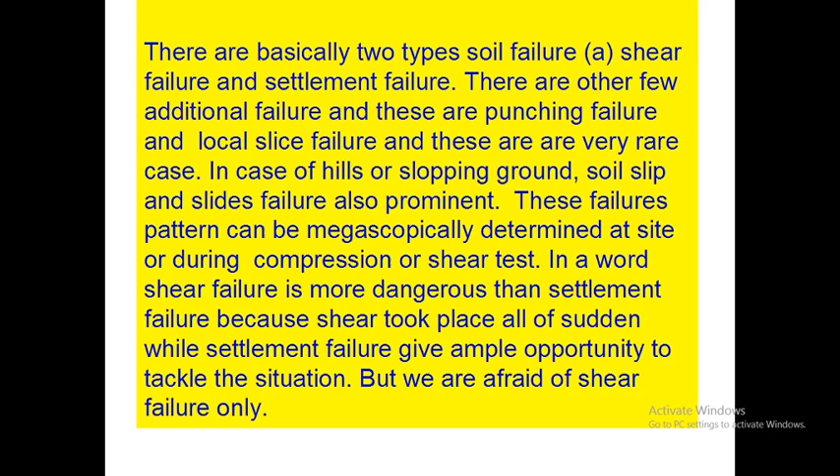while settlement failure gives ample opportunity to tackle the situation. But we do not know why, we are always afraid of settlement failure only, ignoring the complexity of shear failure. We should be very much serious about shear failure only.

During my long and young age, one of my reverend professors once said workmanship has a main role in engineering and construction. He had casually also said that in Kashmir Valley, more than 50% of buildings are designed by ordinary skilled workmen, which we generally know as masons, and the rest 50% are well designed by engineers.

But buildings constructed by masons are completely safe for more than a few decades. This implies that an improperly designed or overloaded structure with good workmanship is much better than a well-designed or normally loaded structure with poor workmanship. But what I personally see is that we do not concern ourselves about workmanship at site, or we are least concerned about workmanship.

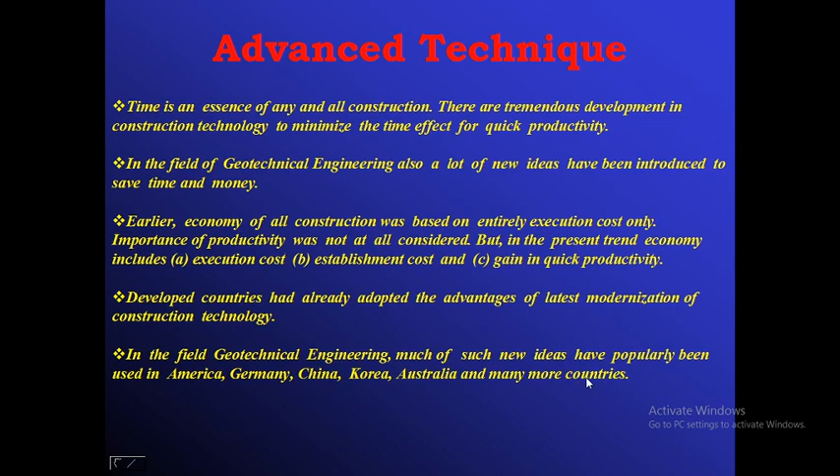Normally what happens at site, if we go for geotechnical investigation works, right from sampling to laboratory testing and complete interpretation of test results, it will take about 1.5 months, or even if it is a big project, then it is 2 months, 3 months, like that.

But there is some type of structure which is founded at a depth of say about 2 meters or 3 meters. For those types of structures, we can estimate the required design parameters such as density, void index, SBC, settlement, etc., by conducting dynamic plate load tests as per ASTM E 2835, using the kinetic energy principles.

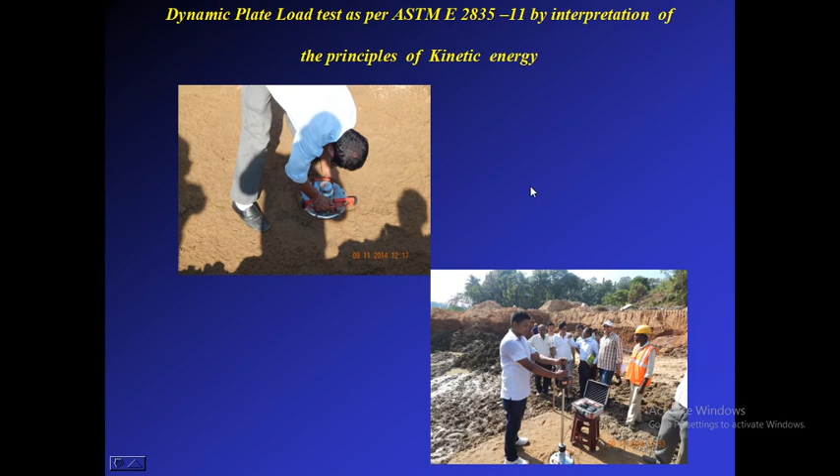In this test, first we have to make an excavated pit up to the proposed depth of foundation, where we shall place the plate perfectly horizontal. This instrument consists of a drive weight, which will fall down from a specific height, causing deflection of the plate, and with that we can calculate the SBC, unit weight (soil density), percentage of compaction, and everything.

This instrument first gives EVD. EVD means soil resilience, the load absorbing capacity. From this load absorbing capacity, we can convert it to force.

The velocity is root over 2gh. We know the height, we know g, and using the impact velocity, we can calculate accordingly. Now we know the plate size, and the kinetic energy is half mv square, so we get this much. Then we can calculate the force, considering the deflection of the plate.

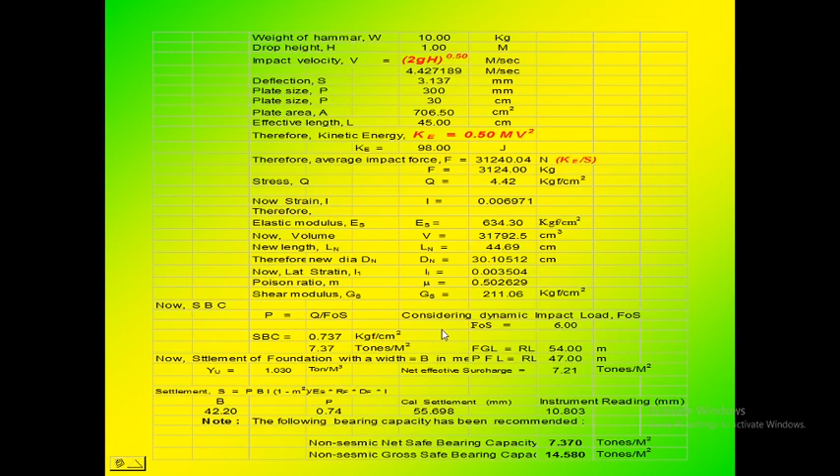From there we can calculate the strain and elastic modulus and shear modulus. And with that load, applying the safety factor, we can calculate the safe bearing capacity. So, see, this another procedure is a very simple procedure.

When there is a foundation soil that appears unsuitable for construction purposes, meaning very low bearing capacity, in some cases especially in northeastern India the top portion, say up to 3 or 4 meters, is very soft and compressible because it is a high water table zone. The NER region, except the hills, is mostly alluvial soil where the water table is close to the ground level.

So soils become oversaturated and the existing overburden is generally resisted only by pore water pressure. In such cases, normally most people prefer to go for pile foundation. But pile foundation is not only costly but also time consuming.

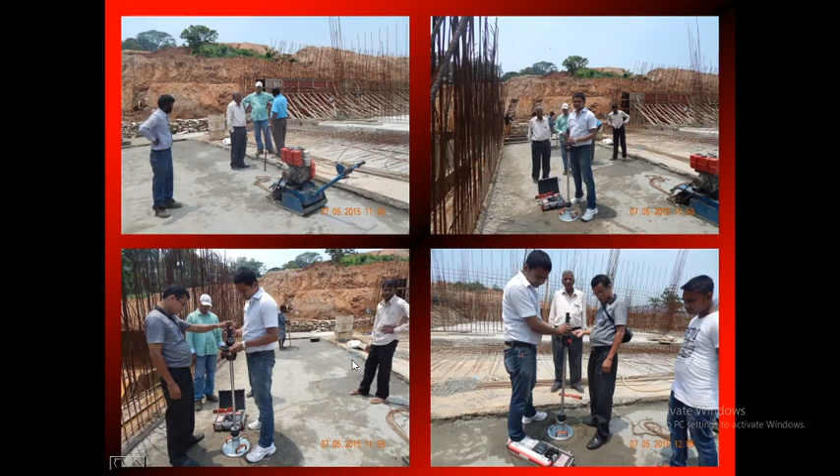In this picture you can see what we normally did. For foundation backfill, we generally dump the excavated material and allow it to consolidate and compact naturally.

But instead of that, another problem arises. Although we do not usually consider the side friction of the foundation, this is most important when, in SBC analysis, we apply the depth factor correction. Depth factor means the frictional resistance provided by the surface of the foundation which is connected with the soil. This soil will give some surface resistance.

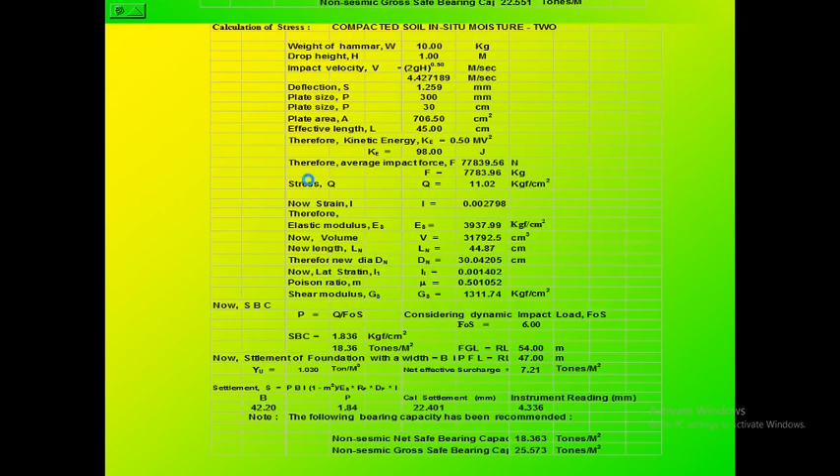You see, we can check this using this instrument. It is the initial layer, it is 93.98, say it is 94% Proctor density compaction, and it is good; more than 90% is good. And the EVD is coming 14.93 Newton per millimeter square. It is soil resilience. Soil resilience means its load absorbing capacity.

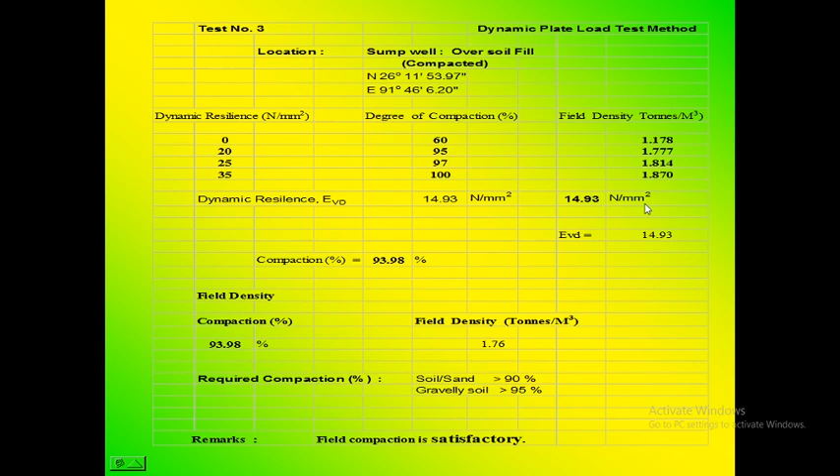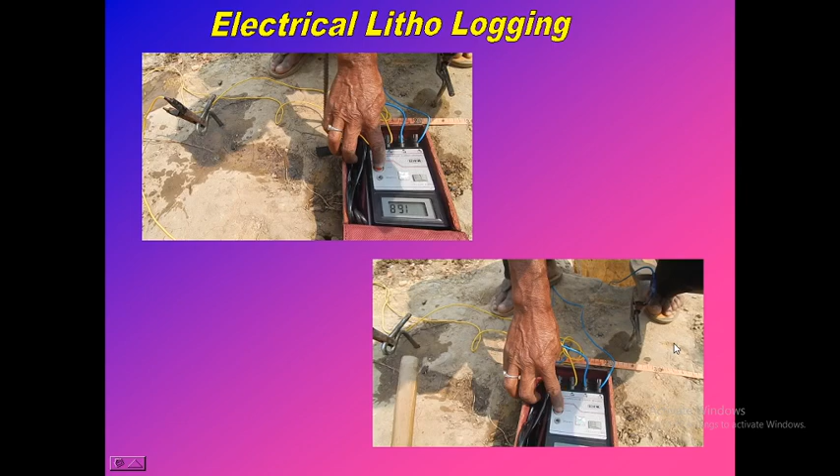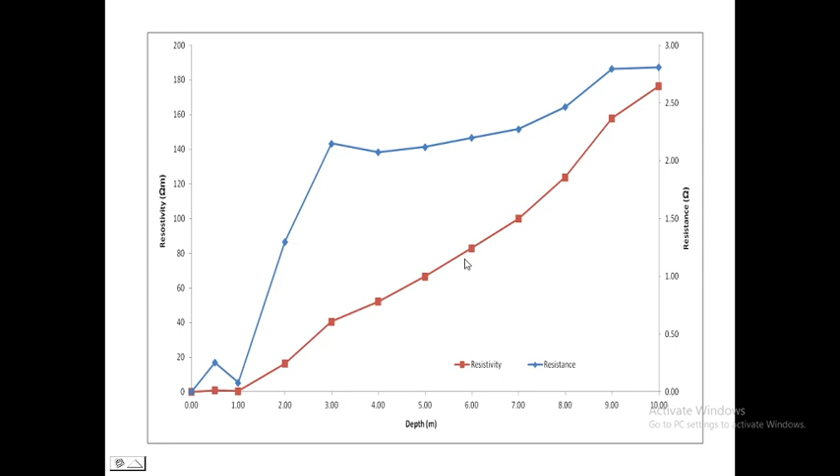Instead of making huge expenditures, we can conduct this electrical litholog for ascertaining the voids, and as we are considering that the void has a direct relationship with the shear strength and consolidation parameters, considering that assumption, we can go for foundation design based on the test results at 2 meters. What generally requires about 2 months can be done within a day.

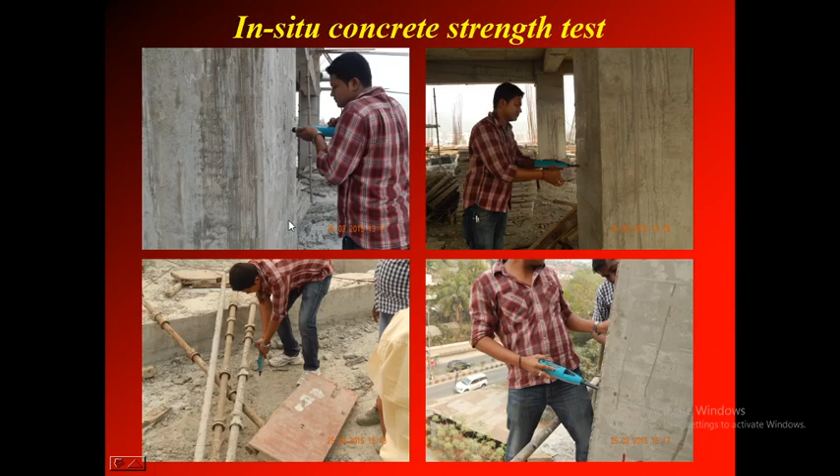Now you see, in case of construction technology, the normal earlier procedure was to use concrete cubes for crushing strength. But generally in the northeastern region we are using PPC cement, not OPC cement, Pozzolana cement. The setting time of this PPC cement is quite high. It requires even 2 months and even a little more.

But our code says that the targeted strength of the cube should be confirmed at 28 days. There are few other conditions. The temperature shall be 27 degrees. But in the northeastern region, say Sikkim, Gangtok, Shillong, Nagaland, in all these places, especially in winter season, the temperature is less than 27, 6 to 10 degrees. And so we cannot get the proper strength. And the code has recommended coring.

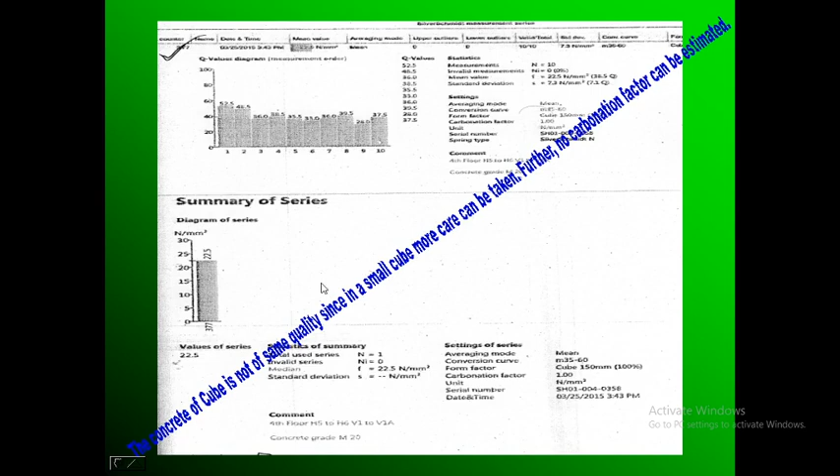You see, there are 10 records. Out of these 10 records, only this one record, only the average was taken. Not only average; it is plus 2 divided by 2, again plus 2 divided by 2. Very repeated calculations are made by the program, and finally it has been recorded. So the N-type hammer has an advantage in this type of work.

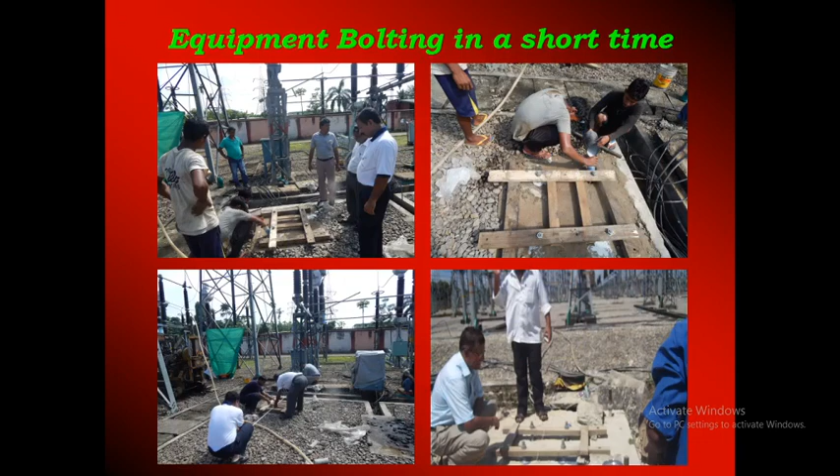Another is what actually happened. Our India is technically developing day by day. What we are using today, tomorrow that has changed. Especially in equipment foundations, say transformer, breaker, reactor, there are a lot of equipments like this. We were required to change one electrical transformer. The old size was different, and with the new size there is a slight variation.

Because you all know mechanical engineering is precision engineering. If there is a variation of a fraction of a millimeter in some nut and bolt, it cannot be fitted properly. So we cannot compromise with precision, especially in mechanical engineering. In civil engineering or geotechnical engineering, in the name of safety factor, we can easily make a little plus minus, 1%, 10% plus minus. But in mechanical engineering, we cannot compromise with the products.

It becomes so hard, and within 2 hours we can fix it. Without breaking the foundation, there shall not be any hair-like crack within the concrete mass, and in the original place, using some mechanical device, we can pull the machine, place it here, and just bolt it. So the setting time of epoxy grout is 2 hours only, with a minimum strength of 50 Newton per millimeter square, and using 25% gravel, the strength increases to 70 Newton per millimeter square.

Time required for rebolting of equipment with the traditional method of breaking the old foundation and constructing a new foundation is 2 months, as I already said. Partial breaking of the old foundation more often produces hair-like cracks, which in the long term reduce the concrete strength and quality as well. These hair-like cracks also generate corrosion of steel and leaching of concrete mass, mainly due to the humid climate of the northeastern region. Time saving is a windfall for quick productivity. Loss of tariff and establishment cost of 2 months is much higher than the epoxy grout.

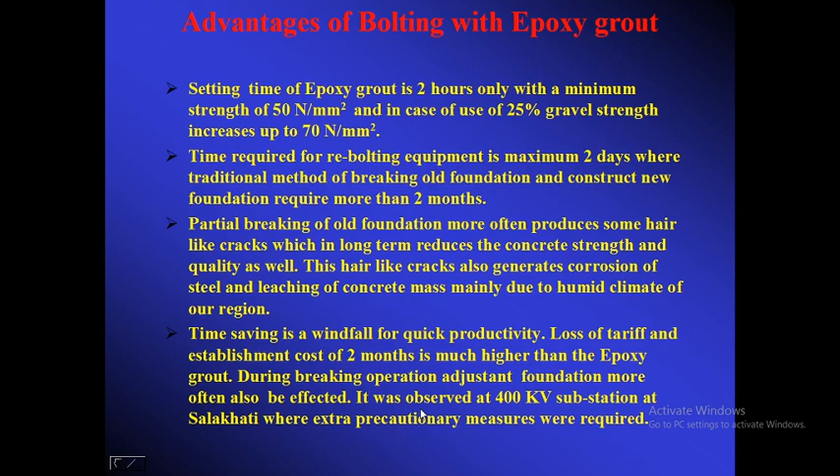During breaking operations, adjacent foundations are more often also affected. It was observed at the 400 kV substation at Salakhati, where extra precautionary measures were required. Normally, if we break the old foundation, the adjacent foundation will be affected, because during demolishing of the old foundation there will be some vibration. That vibration passes to the soil, and the soil makes vibratory forces which affect the adjacent structure. To avoid all this, this method is very useful. I suggest you all take this simple method, which is time saving and efficient.